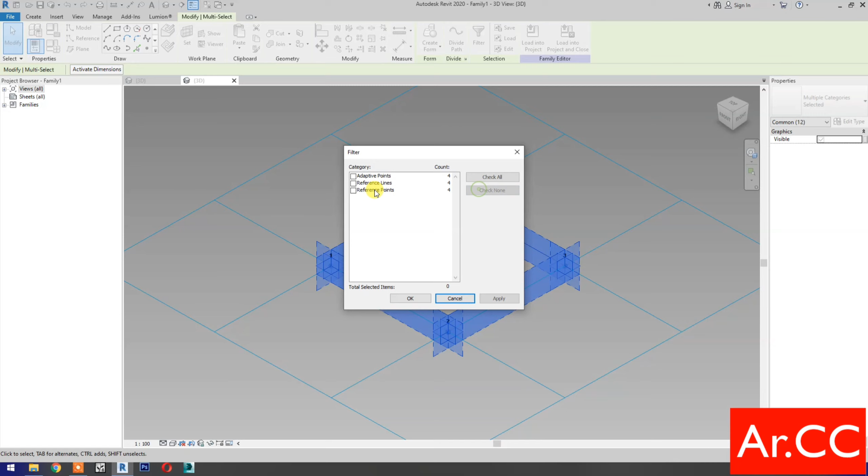Cancel the command, select all, go to filter, check none, select reference point, apply, OK. Go to offset, pick the button, create new parameter.

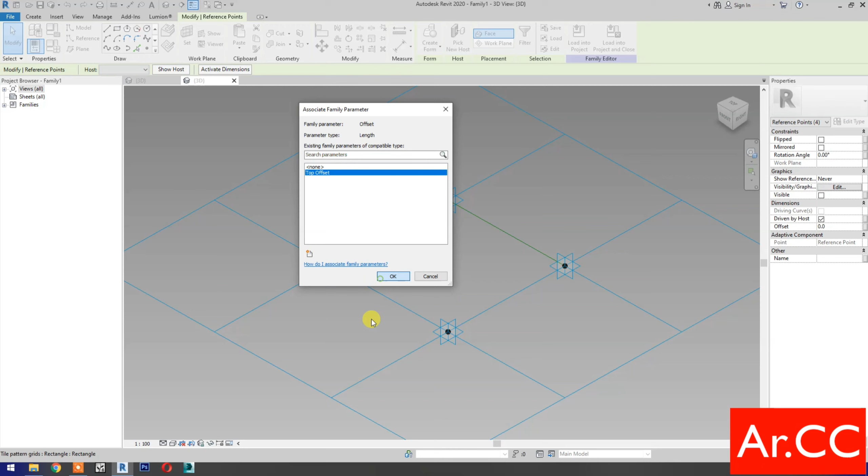Type top offset, OK. Go to family types, change the value to 100, apply, OK.

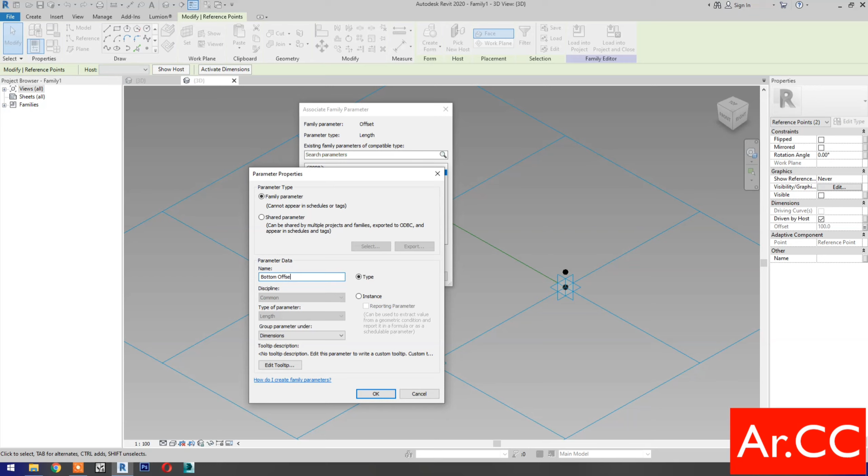Select these two reference points, go to offset, pick the button, create new parameter, type bottom offset, OK.

Go to family types, change the bottom offset to 150 mm, apply, OK.

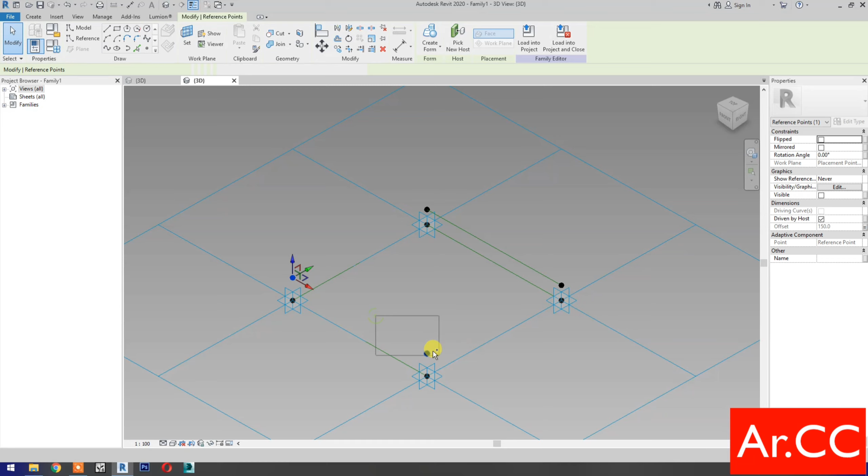Next, select these two reference points, spline through points, check reference line. Select these two reference points, spline through points, check reference line.

Next, select this reference line, divide path, change the number to 10. Select this reference line, divide path, change the number to 10.

Select reference point, pick reference point, then pick, OK. Next, pick here, alternate, pick.

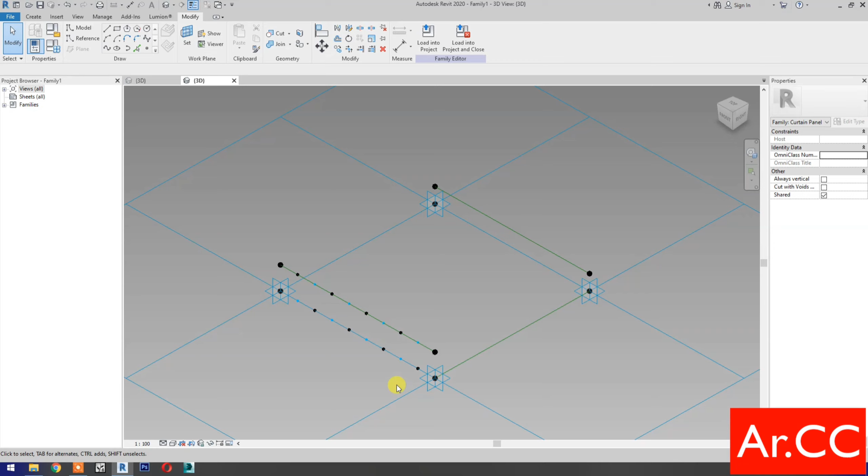Next, select this reference point, then spline through points, check reference line.

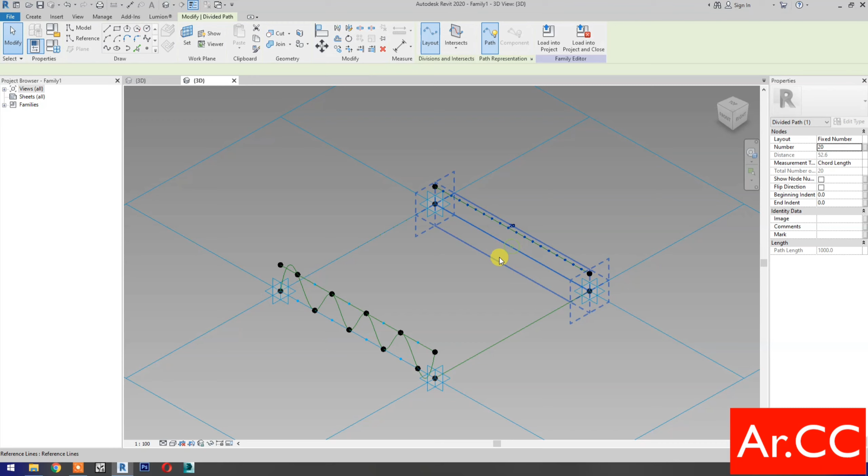Select this reference line, divide path, change the number to 20. Tab, select this reference line, divide path, change the number to 20.

Next, select reference point, pick reference point, alternate, pick, OK. Pick here, alternate, pick.

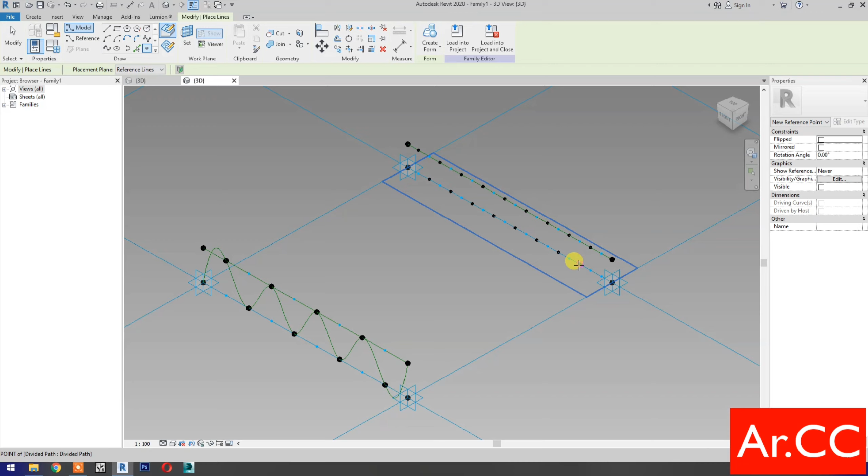Next, select this reference point, then select all the reference points.

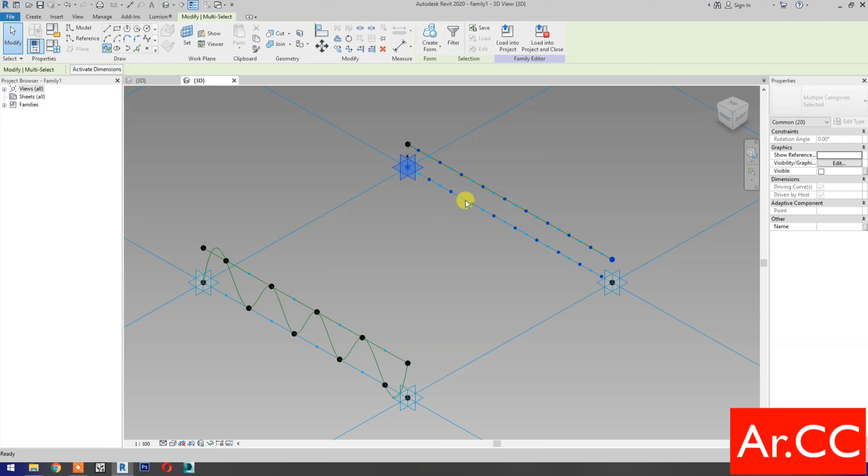Okay, then spline through points. Check reference line.

Next, select these two reference points. Spline through points. Check reference line.

Go to the other side. Select the two reference points. Spline through points. Check reference line.

Select reference point. Pick at midpoint. Then pick at midpoint.

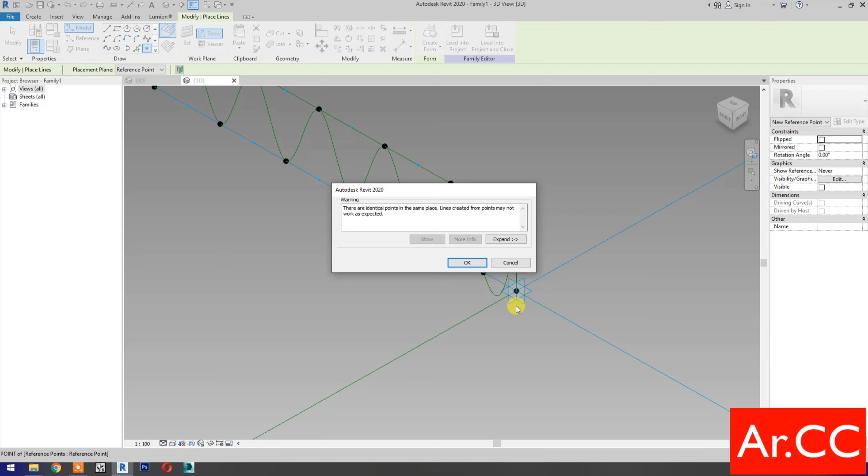Next, reference point. Set work plane. Set the vertical plane. Set. Pick reference point. Okay. Select the reference point.

Go to offset. Change the value to 50 millimeters. Then go to the other side.

Reference point. Set work plane. Set the vertical reference plane. Set. Pick reference point. Okay.

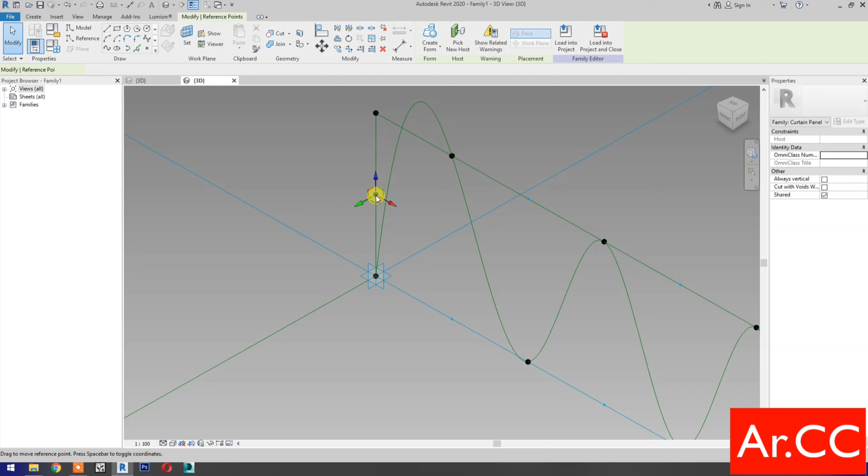Select reference point. Offset. Change it to 50 millimeters.

Next, circle. Set work plane. Set the vertical plane. Set. Then draw the circle with a 20 millimeter radius.

Select the circle. Check reference line.

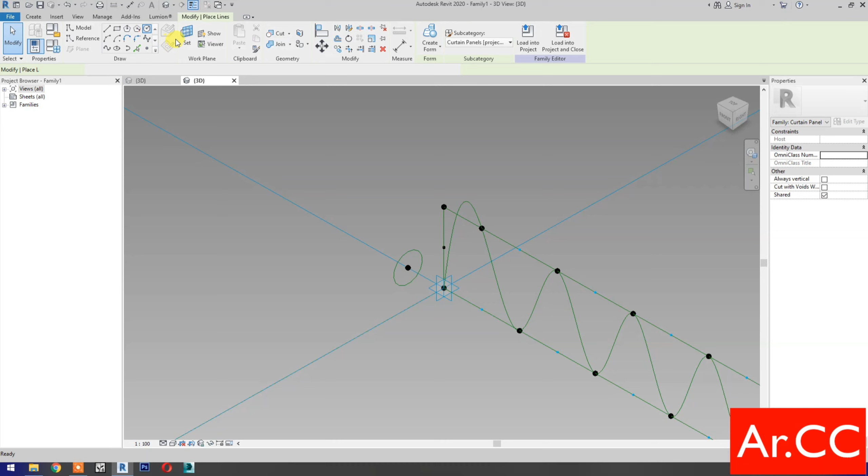Circle. Set work plane. Draw a radius of 10 millimeters. Select the circle. Check reference line.

Go to the other side. Orbit. Okay.

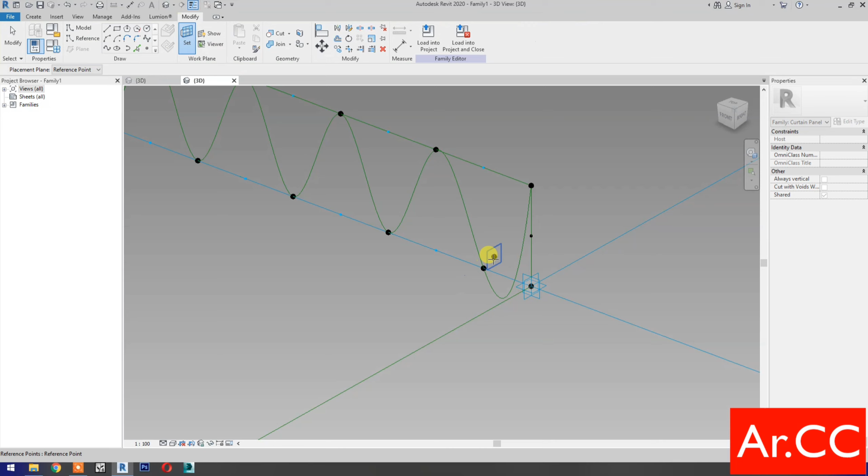Next, circle. Set work plane. Set the vertical plane. Draw a circle with a 20 millimeter radius.

Okay, select the circle. Check reference line.

Circle. Draw a circle with a 10 millimeter radius. Select the circle. Check reference line.

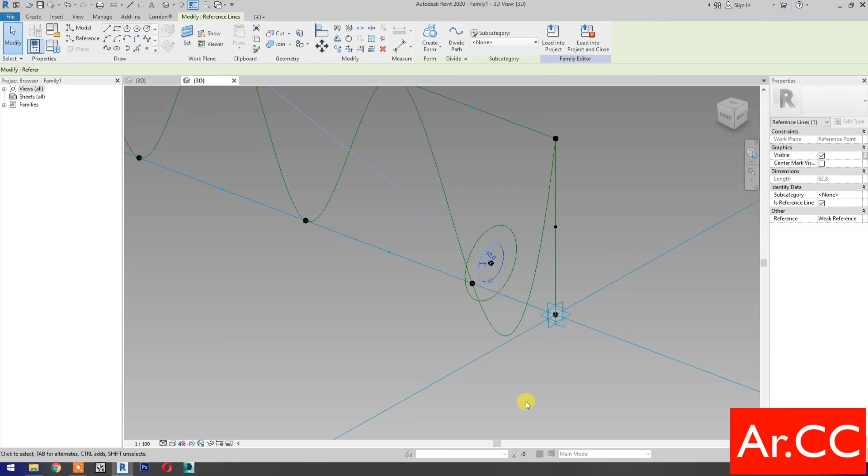Okay. Next, select the spline. Select the other spline. Create a form.

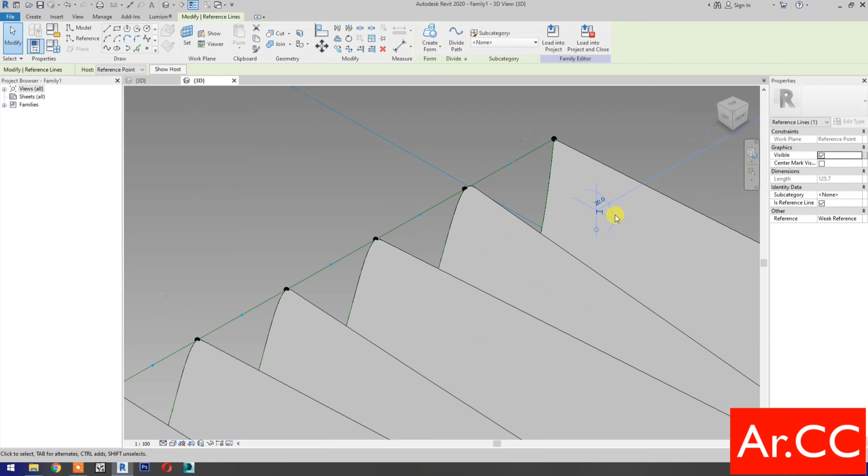Then select the big circle. Rotate the cube. Hold Control and select the big circle. Create a form.

Okay, select the form. Solid/void. Select the void.

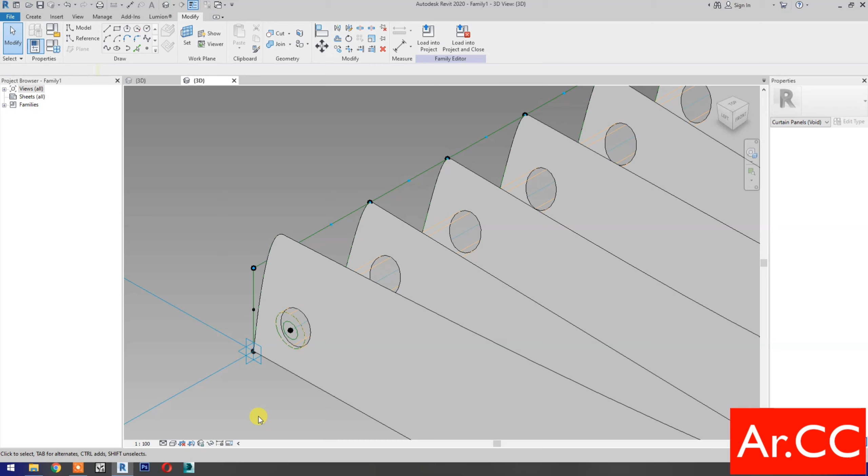Next, select the fine realistic view.

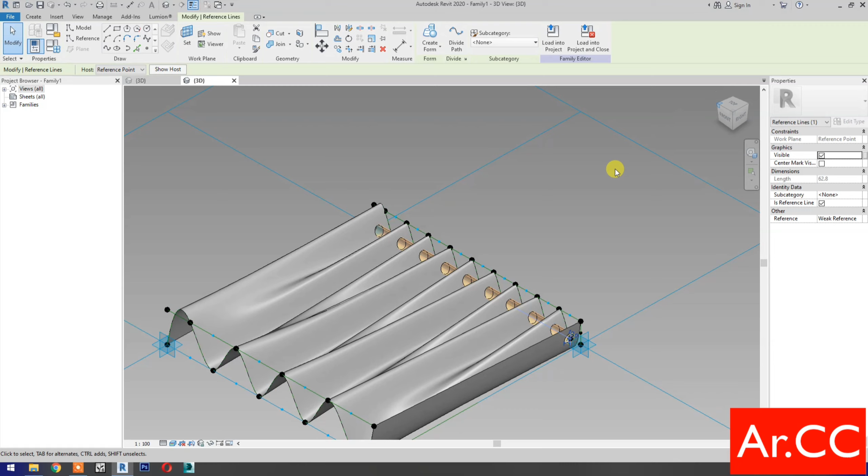Then select the small circle. Rotate the cube. Select the small circle. Create a form.

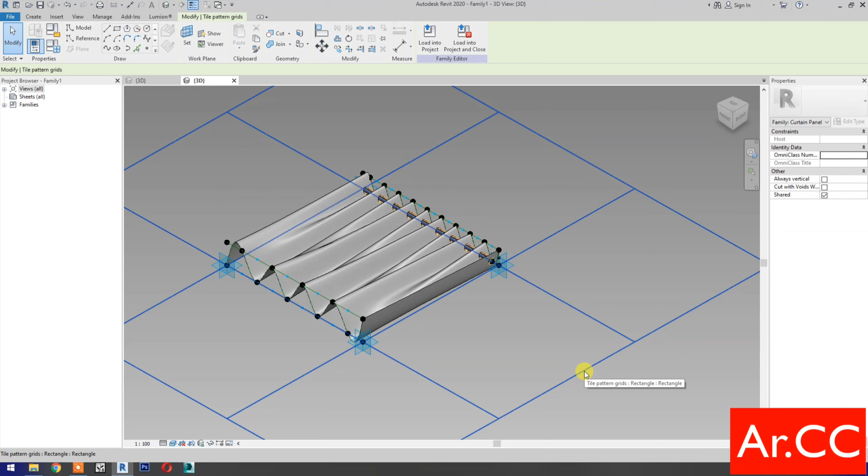Next, select the grid. Let's change the vertical spacing to 2000 millimeters.

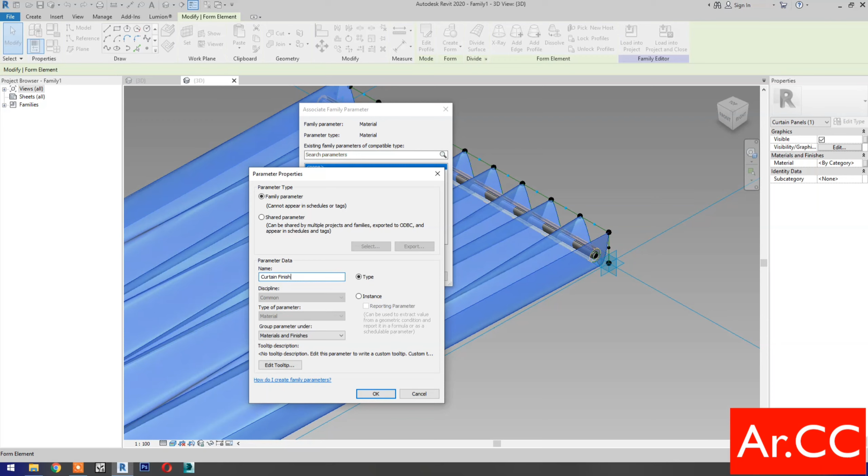Next, select the curtain. Go to material and finishes, create new parameter, name it curtain finish. Okay.

Select the curtain rod, go to material and finishes, pick the button, create new parameter, name it rod finish. Okay.

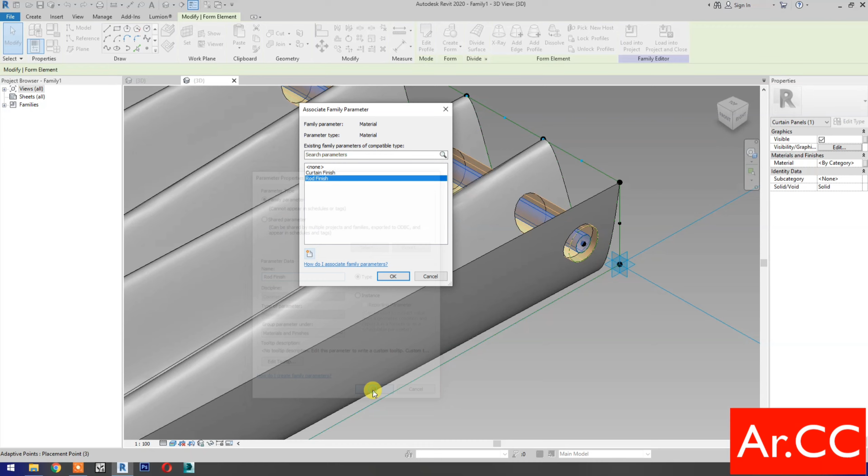Next, go to family types, curtain finish, pick the button, go to material library, select the AEC material, select fabric, add, right click and rename it.

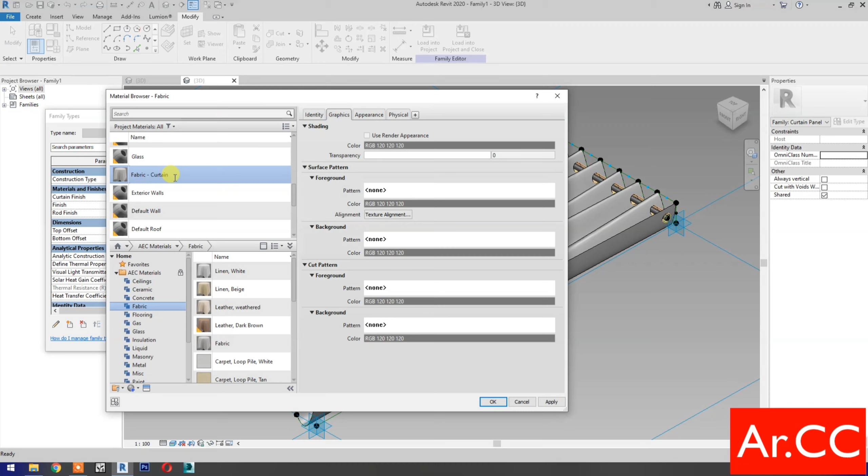Name it fabric curtain. Okay, apply, then rod finish.

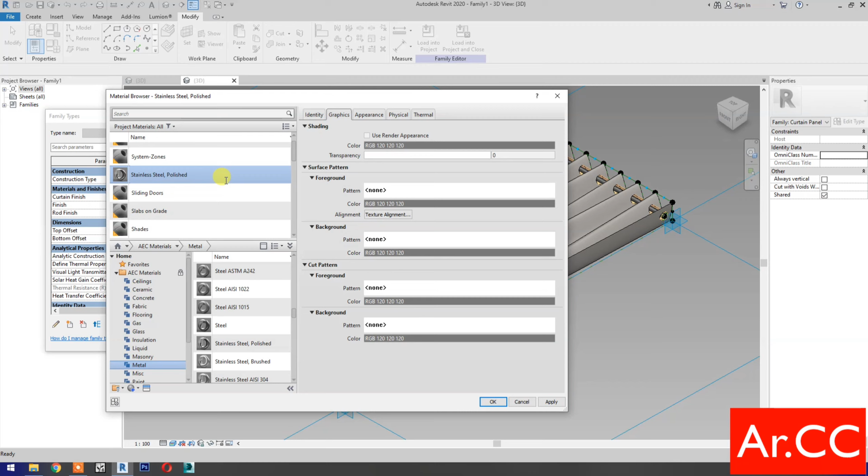Go to material library, AEC, select metal and select stainless steel polished, rename it stainless steel polished rod. Okay.

Next, go to family types. Let's test the parameters. Change the bottom offset to 250 and the top offset to 150. Apply. Okay.

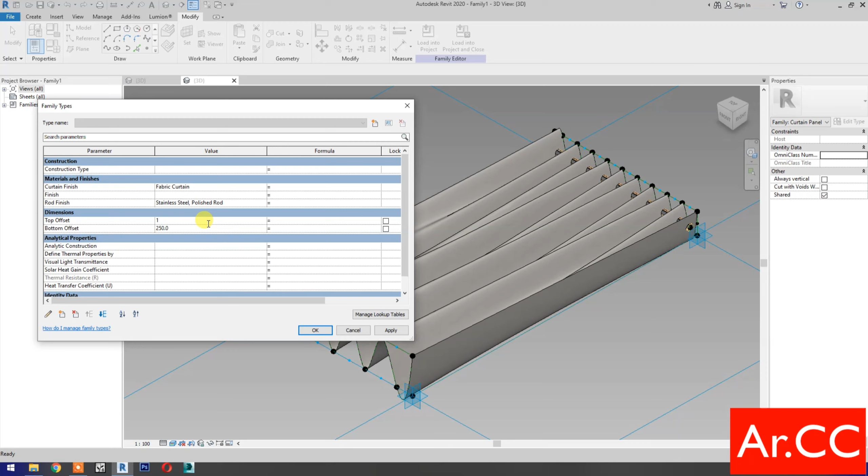Go back to 100 and 150. Apply. Okay.

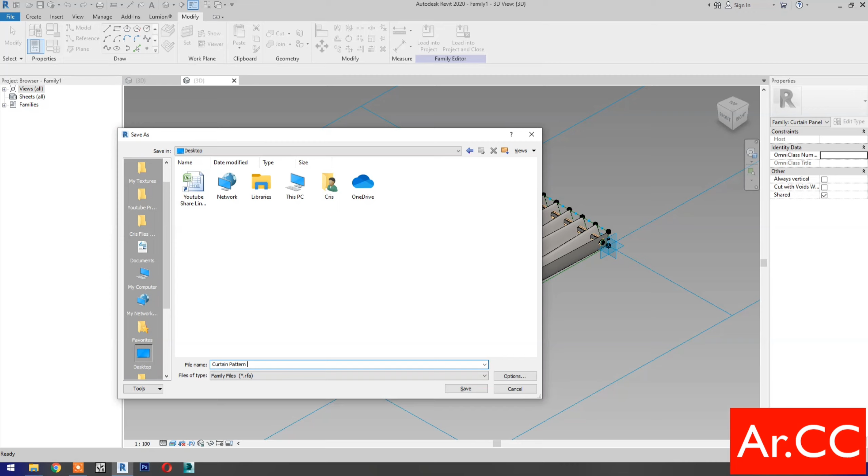Save the family. Go to desktop and name it curtain pattern base. Save, then load it into the project.

Go to level 1. Let's create the curtain.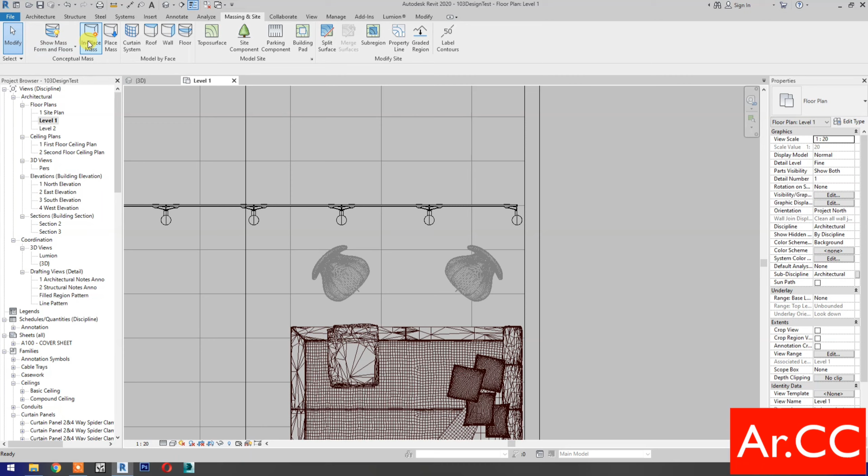Go to massing and site. Turn on show mass. Select in-place mass. Name it Mass 1. Okay. Select the line.

Draw the profile. Select the line. Check reference line. Create a form.

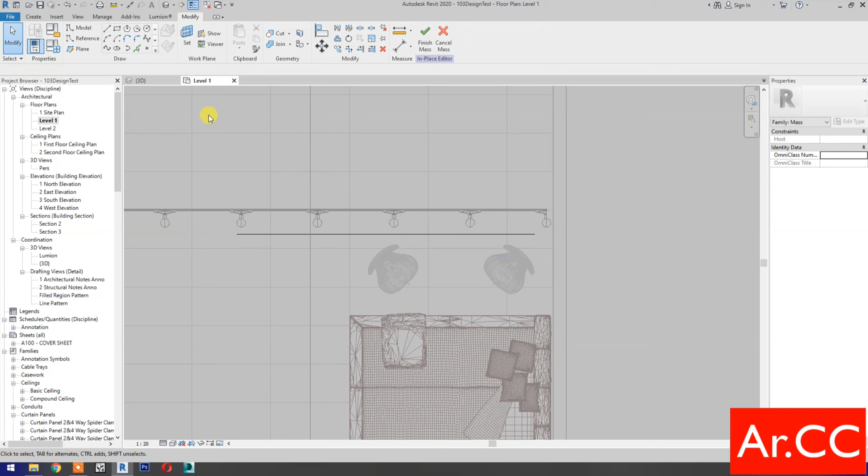Go to 3D. Select the surface. Unlock. Change the height to 2.8 meters.

Select the surface. Divide surface. Change the V grid number to 3 and the U grid number to 1.

Okay. Next, go to pattern. Select the curtain pattern base. Okay.

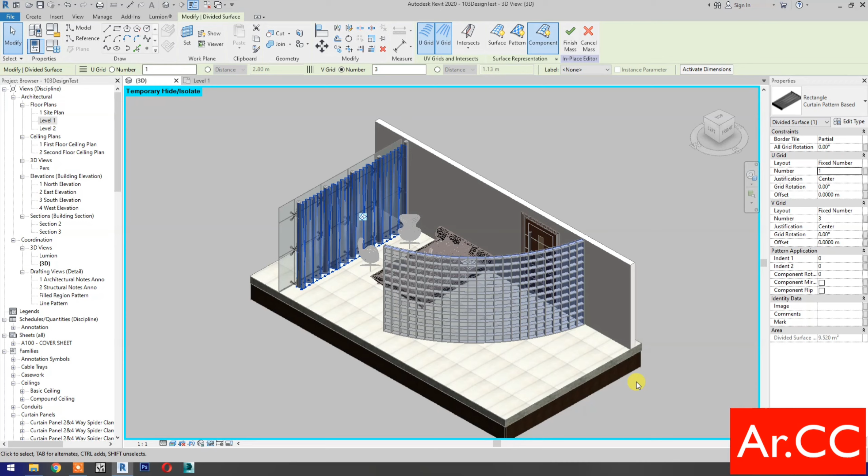Check. Finish the mass. Go to level 1.

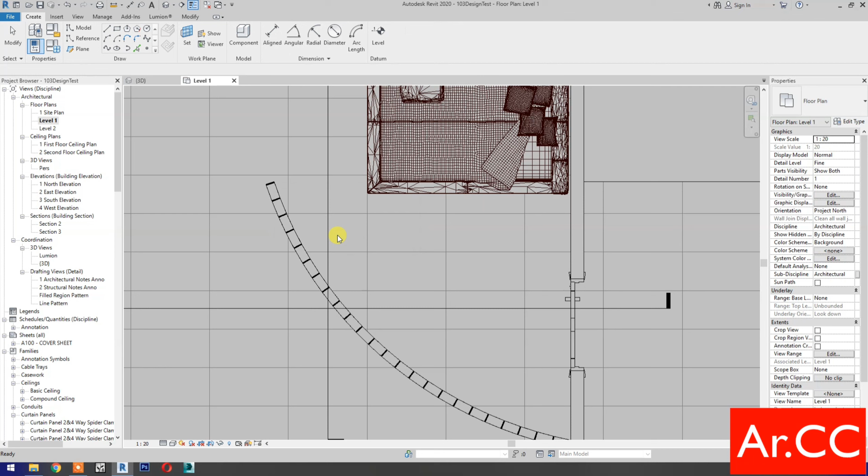Massing and site. In place mass. Name it Mass 2. Pick lines. Change the offset value to 0.3 meters.

Select the center of the wall. Select the lines. Check reference line.

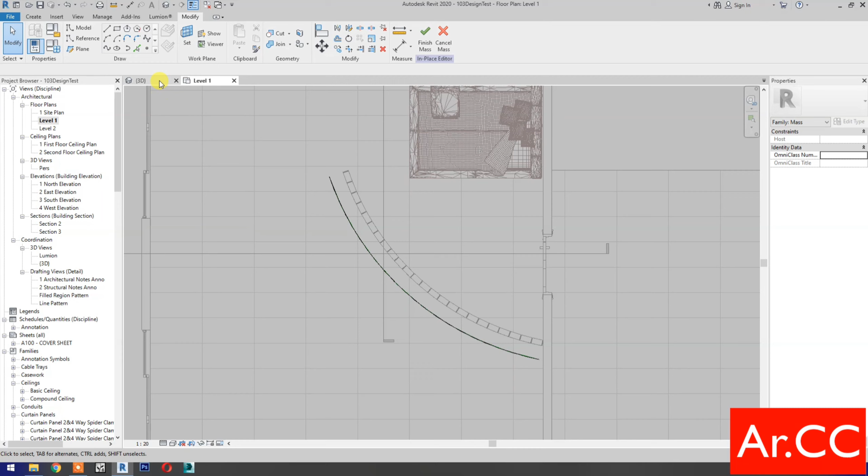Create a form. Go to 3D. Select the surface. Unlock.

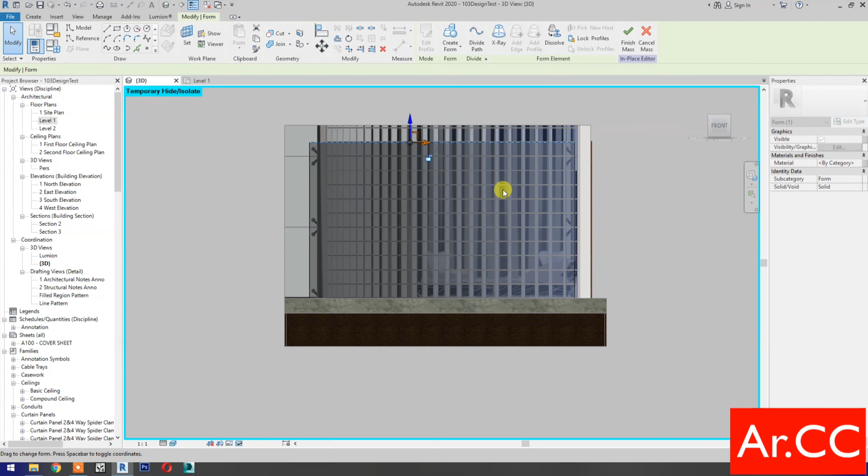Select the edge. Go to front elevation. Okay, move the edge. Move the arrow. Okay. Then back to 3D.

Select the surface. Divide surface. Change the U grid to 1 and the V grid number to 6.

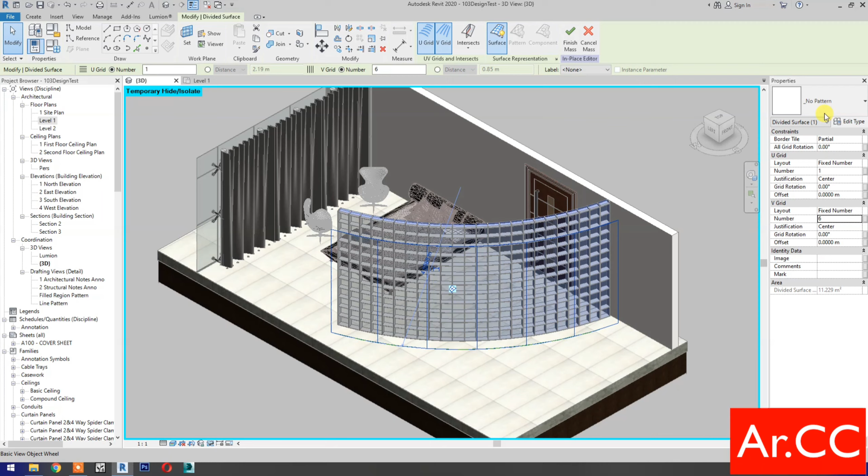Then select the curtain pattern base. Okay.

Next, let's turn off the nodes. Let's go to curtain pattern base, edit the family.

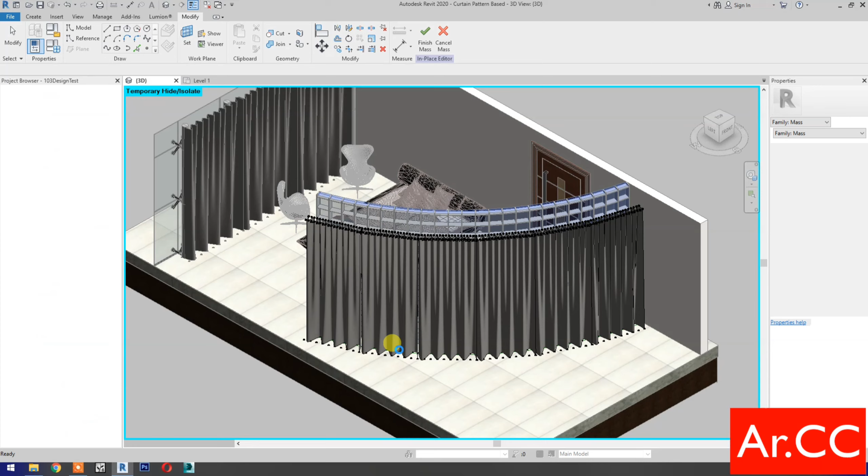Okay, zoom, select the path representation, uncheck nodes. Okay, select this path, go to path representation, uncheck nodes.

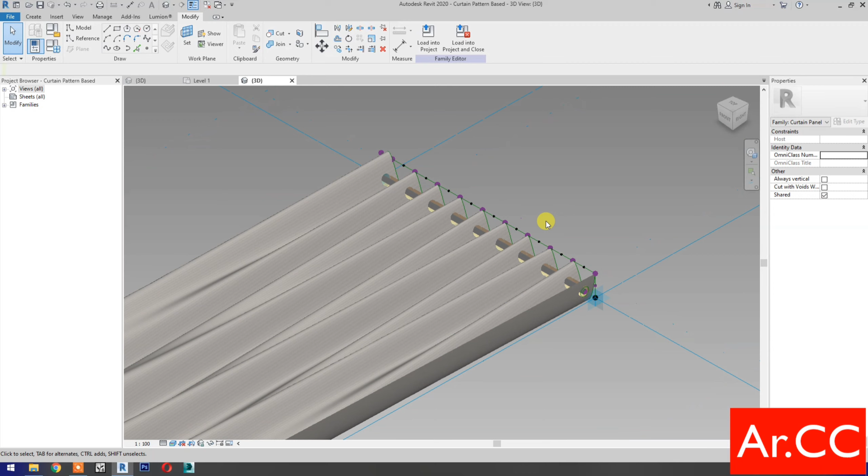Okay, select the path, uncheck nodes. Okay.

Rotate the view, select the path representation, uncheck nodes. Okay.

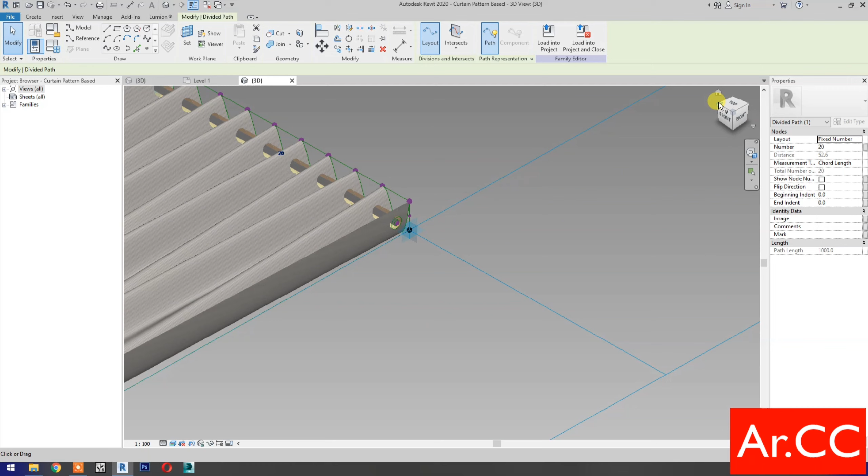Save the family. Yes, load into the project. Done. Thank you.